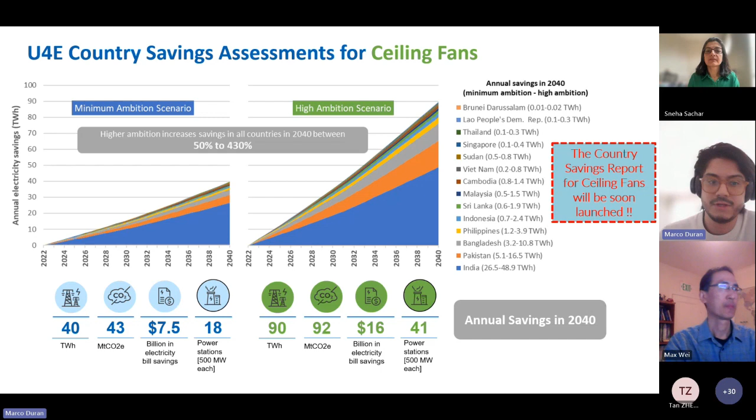Now, the U4E model regulation guidelines is part of a series of these guidelines that we have been developing for the last years, since 2019, and prior to that on lighting as well.

We have for the U4E products, the lighting, electric motors, distribution transformers, but also recently commercial refrigeration, and prior to that, domestic refrigerators and room ACs. These are guidance to inform regulatory authorities and policymakers to set up not only minimum energy performance standards, which are certainly key, but also to take voluntary approaches through incentive programs.

This is why, besides the floor or the minimum ambition, we also have the higher tiers to understand what is efficient and high efficient, and what to target for these programs. Over 60 technical experts have provided voluntary expertise to advise and steer the development of this. For the cooling ones, they also have refrigerant global warming potential ceilings, and the dual focus as well.

Last year, in MOP 35, we released the ceiling fans model regulation, which we'll be presenting today. As per every model guideline, we have guidelines which provide scope of products, terms and definitions, requirements, and other content that Max will go through in more detail. We also have supporting documentation, which provides the rationale, the analysis, the data that was available, and the cost benefits and other considerations for the recommendations provided.

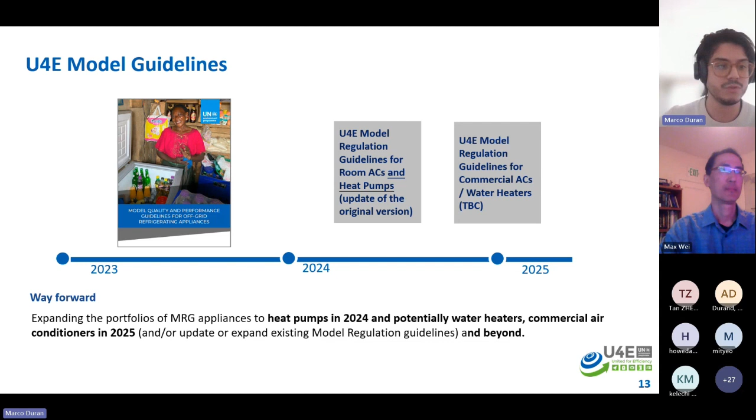Coming up, in 2023 we also developed the model quality and performance guidelines for off-grid refrigeration equipment. These were also released back at MOP 35. We're currently working on an update for the model guidelines for room air conditioners to also include provisions for heat pumps. In the future, we're thinking about adding water heaters, commercial ACs, and beyond.

So now we will go back to Mr. Max Wei from Lawrence Berkeley National Laboratory, who will be presenting on the contents. Max, the floor is yours.

Thank you very much. Yes, thank you, Marco and Sneha. Can you hear me? Yes, we can hear you well. Great.

So thank you, everyone. I'll be discussing the approach to developing the U4E ceiling fan model standards. As Marco mentioned, there's a model regulation document and a model regulation annex that has all the information that I'll be describing in much greater detail.

Next slide, please. I'd just like to acknowledge my collaborators, Chao Ding and Nihar Shah. Just before I get started, a few brief words on Lawrence Berkeley National Laboratory.

We're a laboratory managed by the University of California for the United States Department of Energy, one of about 17 national labs in the US. I believe it was the first one, and the home of big science pioneered by Ernest Lawrence. But we're really dedicated to solving some of the most pressing scientific problems facing the world.

In particular, we have more than three decades of work internationally on clean energy and climate policy, especially on appliance standards, where the first appliance standards, I believe, were developed, at least in the US, in the 1970s with Art Rosenfeld and team. We're very proud of that heritage, and we continue that work today. Next slide.

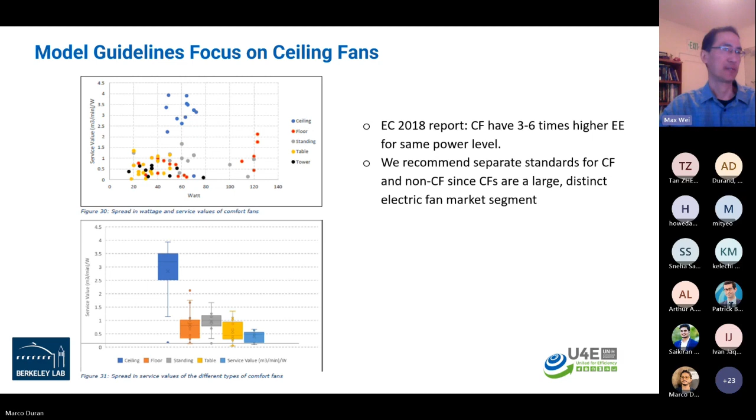The units of that are meters cubed per minute of airflow per watt. This term is used very interchangeably with energy efficiency, so it might be confusing in some cases. But in general, higher airflow and lower power gives greater efficiency, and larger values of ceiling fan service value are better - we want a high value of this ceiling fan service value.

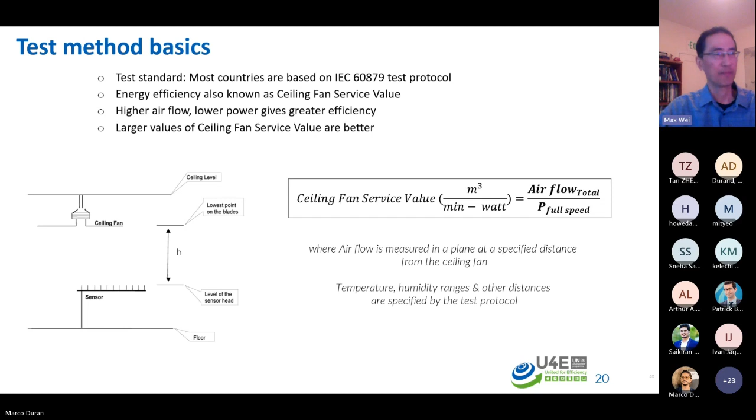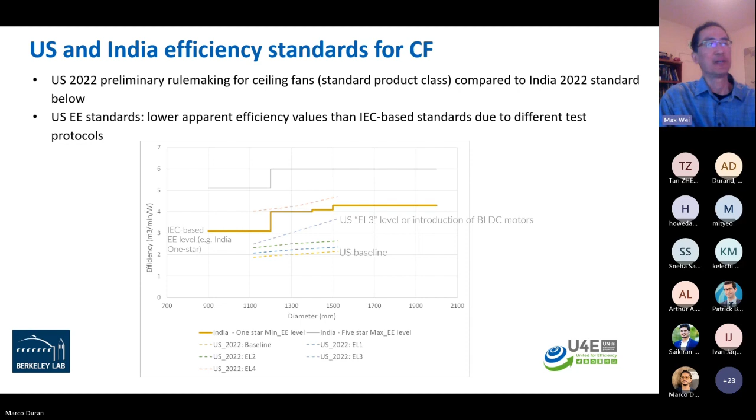I'm showing here the current energy efficiency standards in the US, just for reference and instructive purposes. It shows the US baseline, the bottommost dashed curve in yellow, and the various proposed efficiency levels in a preliminary rulemaking from 2022 for the US. The US baseline is considerably lower than the 1-star level in India, but I believe this is an artifact of the testing protocol - there's a different testing protocol in the US. So this apparent difference of about 2 units of efficiency is really an artifact, a difference in the testing height and width of the configuration just shown. But it really highlights the importance and sensitivity to the testing standards - keep that in mind, that's a very important piece and very specified.

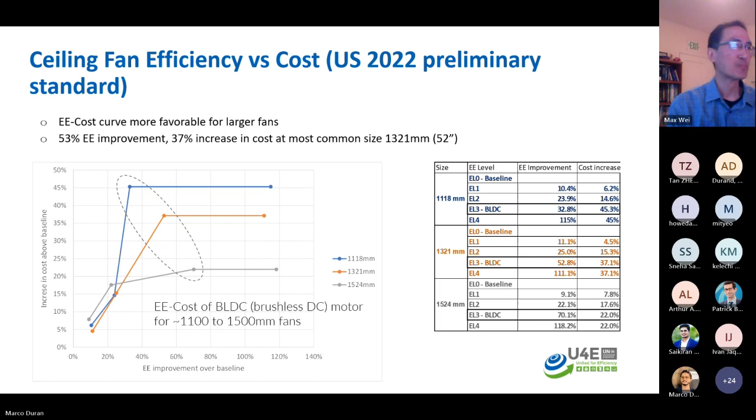Now for the maximum efficiency levels, we try to look at the best performance markets around the world. We looked at fans from the EU TopTen database, as well as the Energy Star database in the United States. Energy Star is a program of highly energy efficient rated products in the United States. Those are shown in the plot, service value or efficiency versus diameter. We look at the upper envelope of those data points, and make sure they're not unique suppliers, so there's more than one supplier and general availability. We make the correction for the US testing standard difference, about 2 units. So we get, as a function of diameter, a high energy efficiency level of 9 below 1200 millimeters, and an energy efficiency level of 11 greater than 120 centimeters, shown here as the topmost black lines.

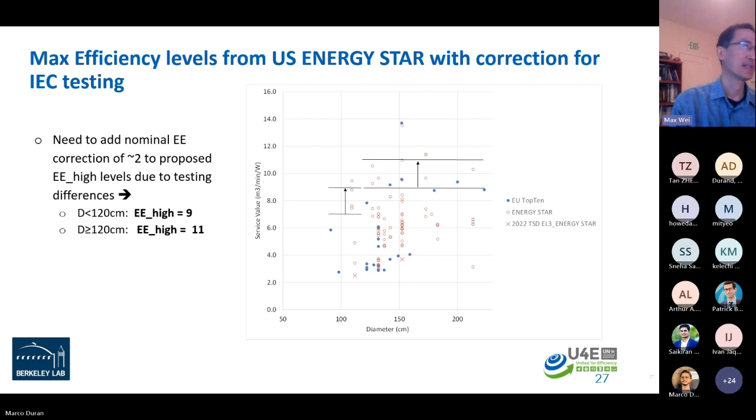I'm going to spend a few slides talking about some practical considerations. Further information on safety and functional performance can be found in Chapter 10 of the Model Regulation Annex. We discuss installation, which has to do with structural mounting requirements since this is a permanent installation—sometimes these fans can be somewhat heavy, not super heavy. Also, the ceiling fan height and distance from the ceiling, so the minimum height above the floor and the minimum distance from the ceiling, and operating conditions, such as these being rated for indoor use only.

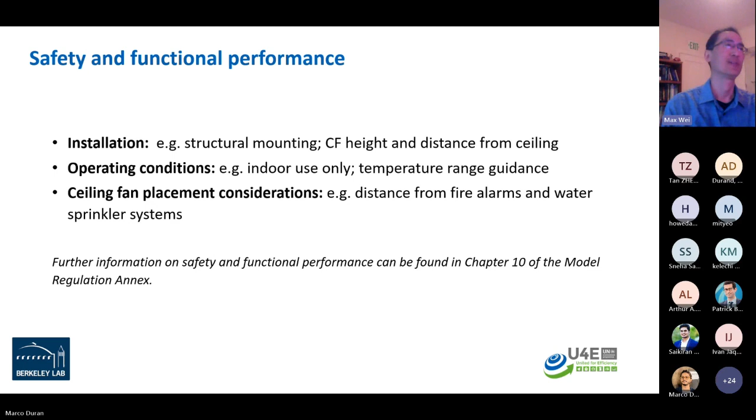On entry into force, conformity, market surveillance, and revision: entry into force refers to the start date and minimum duration of regulation. Declaration of conformity refers to compliance with energy efficiency requirements and things called a conformity assessment report, or CAR. Market surveillance has to do with compliance verification, market monitoring, test lab accreditation, and so forth. Finally, revision has to do with the frequency of strengthening these regulations—the frequency could be on a beat rate of every 3 to 4 years, for example. Further information on these items can be found in the model regulation. There's also a section in the annex on improving fan performance through blade design and through the motor type, as I mentioned.

Now a few moments on implementation preparation. If these are new to your location or country, potential starting points include: are there nearby countries with MEPS to consult with, or to see how things are being organized? Similarly, are there any testing facilities nearby? If the fan standard is new, you could consider starting at the minimum standard level that we have here. But if your location or country has a standard already in place, you could consider a medium service level if you feel there's capacity to meet that, or higher than the minimum service level here.

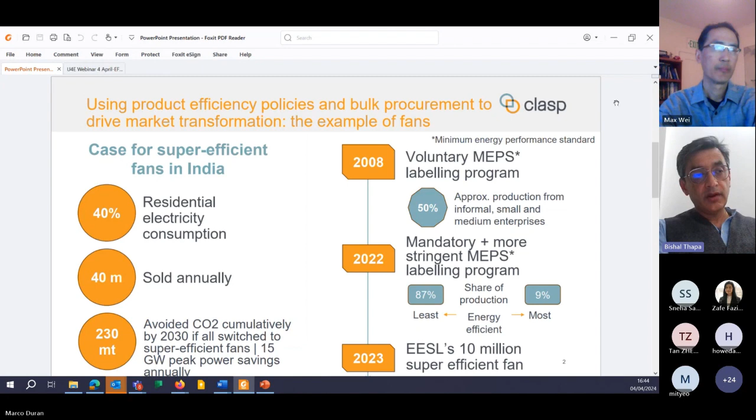Now, from 1 star to 5 star, we want to nudge the market up. This is where we've begun to collaborate with several partners to support a program that Energy Efficiency Services Limited, India's large state-owned ESCO company, has launched, called the 10 Million Super Efficient Fans program. The idea is essentially to nudge market efficiency up so it then has a ripple effect back to the MEPS.

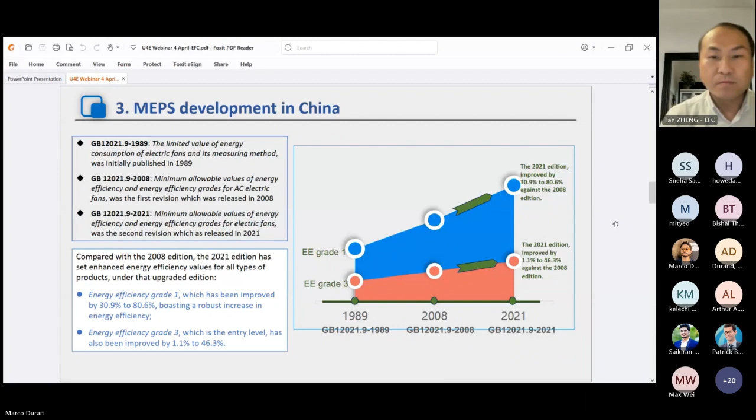is aligned with the IEC standard testing standards 60879. The testing equipment, testing procedure, and testing method are consistent, but the airflow calculation has a little difference. Okay, next slide.

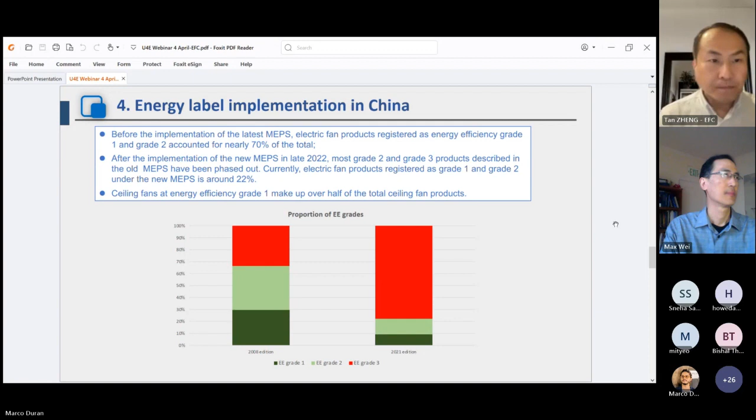Last year, the Philippines released implementing guidelines for an energy labeling program for electric fans, and they adopted IEC testing methods, but still no MEPS. Thailand introduced a voluntary ministerial regulation prescribing high efficiency electric fans, including ceiling fans, with 2 categories, with blade diameters of 1200 and 1400, but still no MEPS.

Countries without MEPS and energy labeling programs are facing very big challenges monitoring their energy efficiency compliance in the market. So next slide, please.